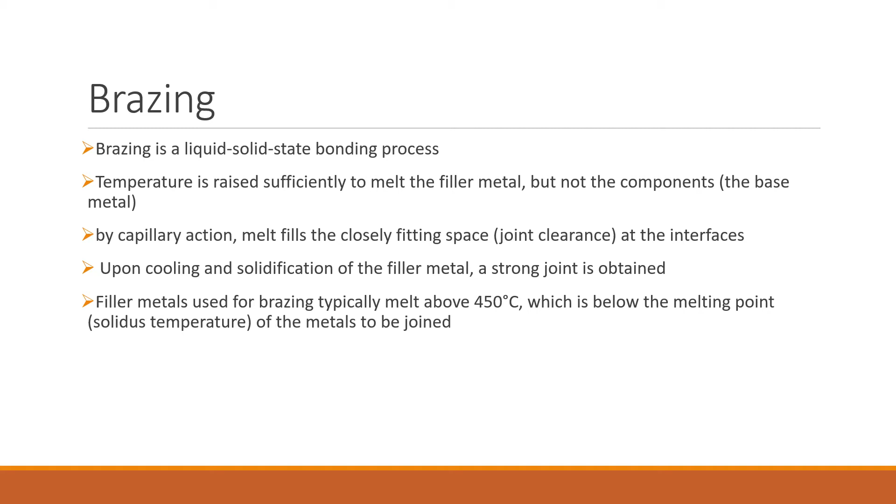So the liquefied filler metal will fill the joint clearance by the phenomenon of capillary rise, or the capillary action, which you already know. So once it fills that joint clearance, it will solidify in it and we get a strong joint. So this is a video of an actual brazing operation being done, and you can see the torch that is being used to melt the filler metal.

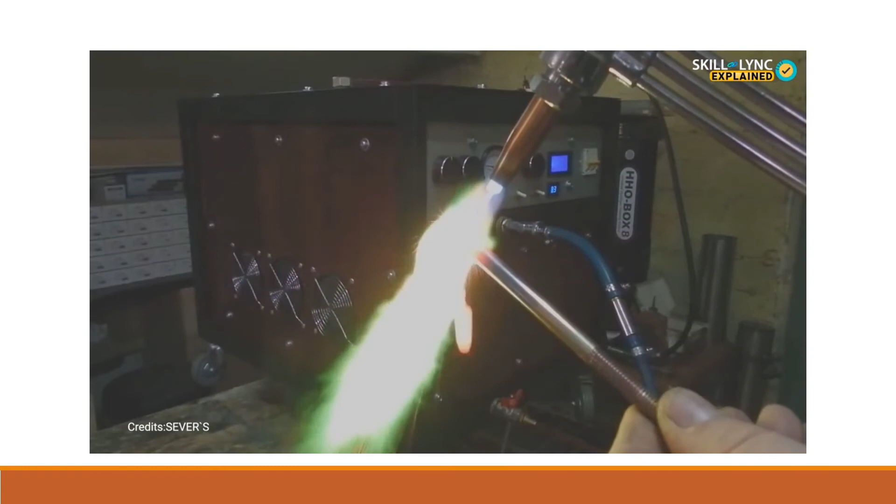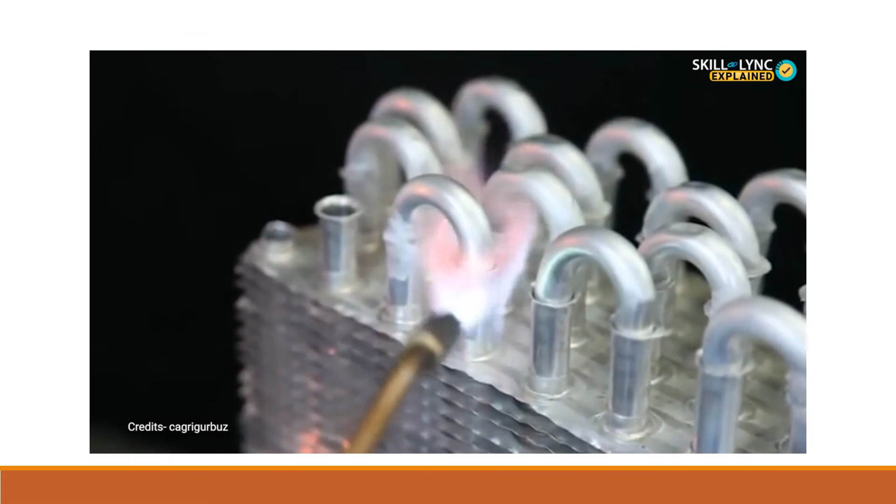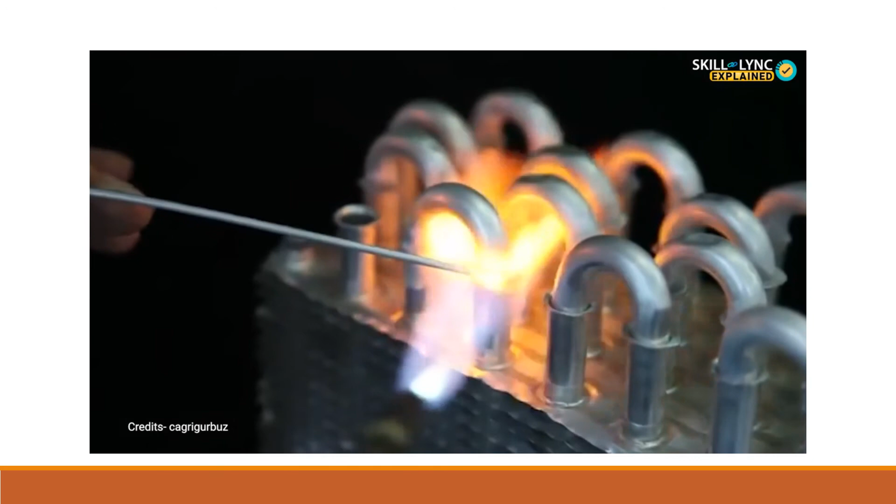So now we can see the video. You can see that the filler metal is being melted using the heat provided by the torch or the flame. It is a reducing flame. Now the base metal to be joined is provided with the molten filler metal. So the filler metal now fills the gap between the two base metal pieces.

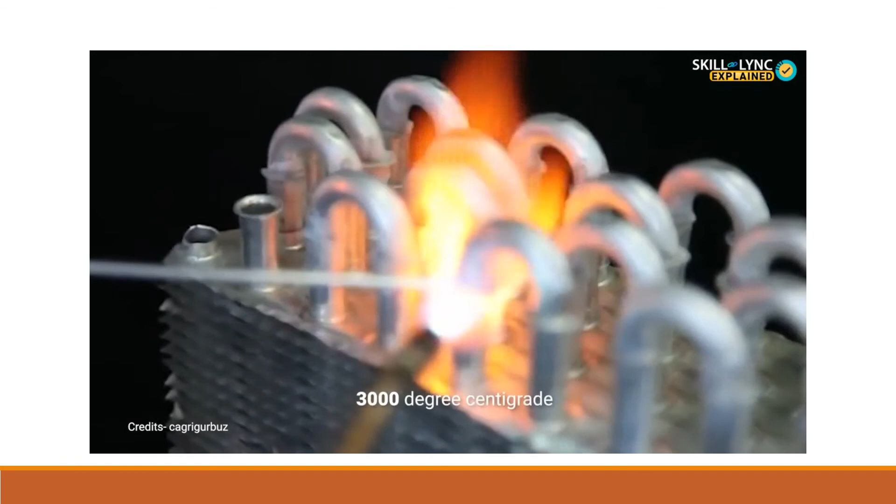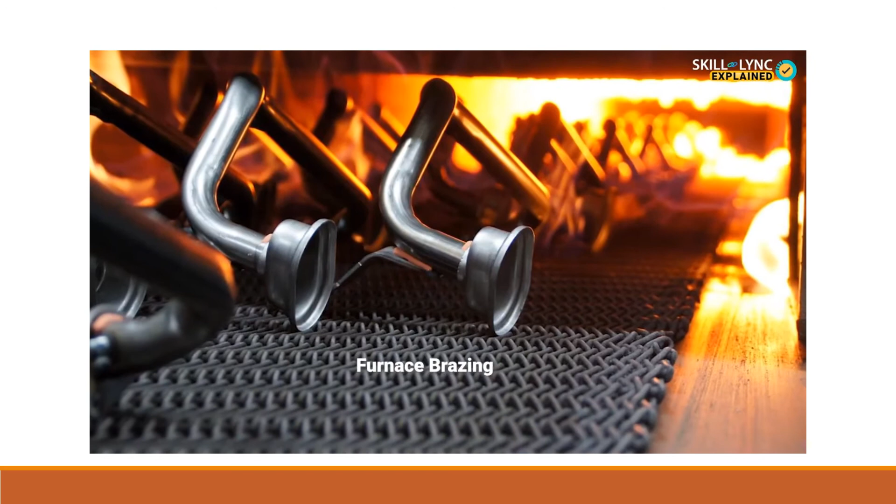And due to capillary action the molten metal will be filling that entire clearance, and once it solidifies we get the joint components, okay, using brazing. So this is the figure of a joined component. So I hope you are clear with this brazing action.

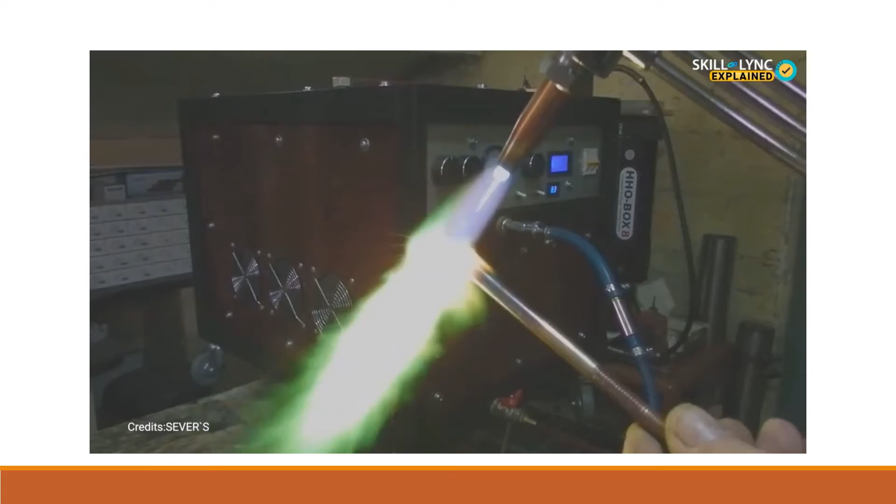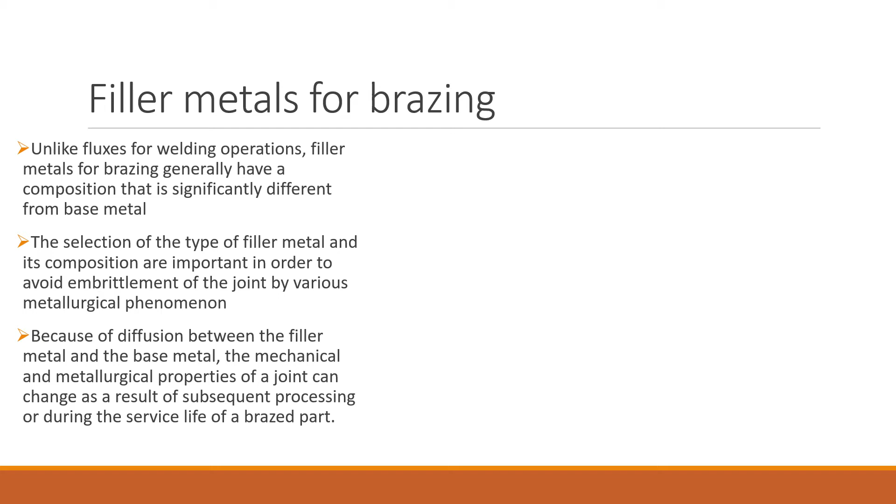Okay, that is the combinations that can be used for different base metal and filler metal. For example, the filler material used for aluminium as well as aluminium alloys is aluminium silicon filler metal, and the brazing temperature is in the 570 to 620 range.

Similarly, iron, nickel and cobalt based alloys, usually super alloys. For these alloys the filler metal we use is gold, and its brazing temperature is 900 to 1100 degrees Celsius. Okay, so these are examples of some of the filler metals that can be used for selected base metals and their brazing temperature.

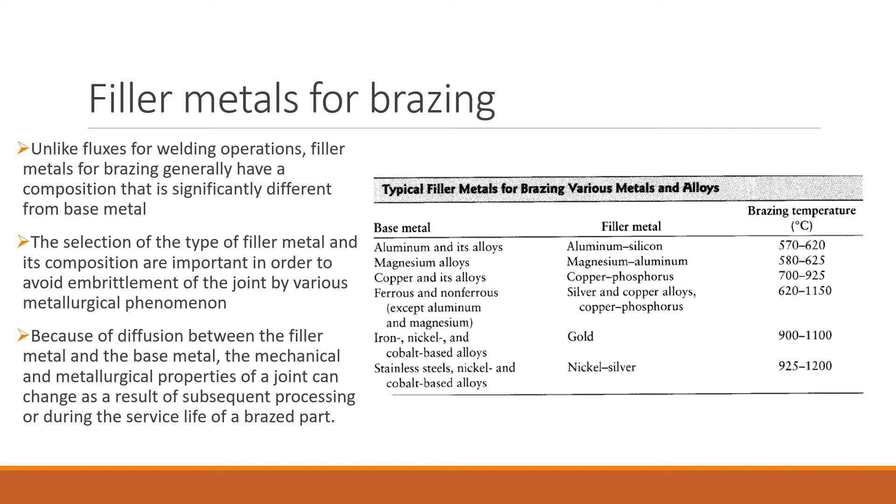So now we will see the various fluxes used for brazing. In welding also we have seen the function or the purpose of using fluxes, which was to prevent the oxidation and to prevent the formation of oxides, which was not desirable as it could reduce the strength of the welded joint.

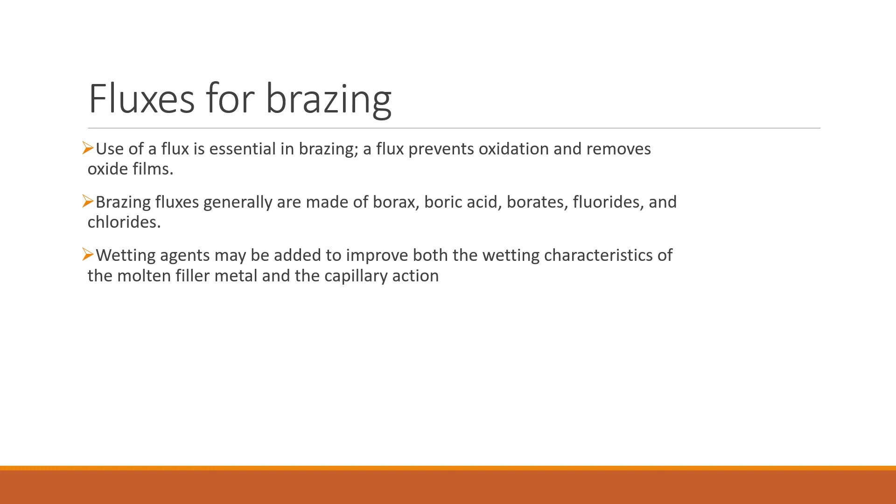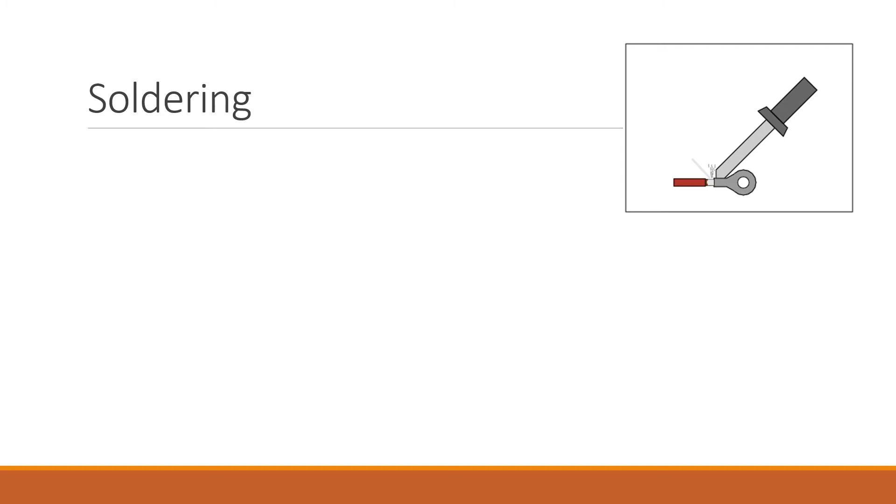So that's all about the fluxes that are used in brazing. So the next method is soldering, and this is a very familiar or popular material joining process, and it is mainly used in electronics industries to connect the electronic components on the circuit board.

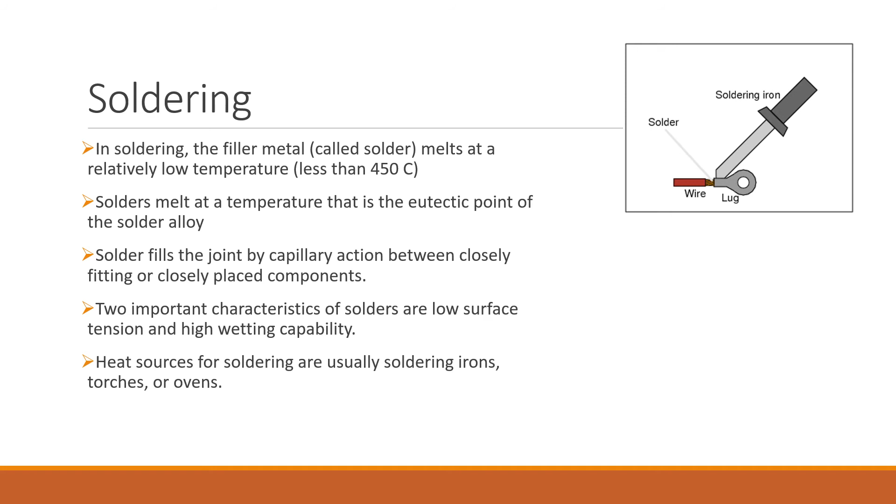It will be melting at a temperature that will be lower than 450 degrees Celsius. So based on this criteria, we can classify soldering and brazing processes separately. So the solders melt at a temperature that is the eutectic point of the solder alloy. The eutectic point is the lowest melting temperature of the alloy, and alloys will be having a range of melting points. And the filler metal we use in this method will be mostly alloys.

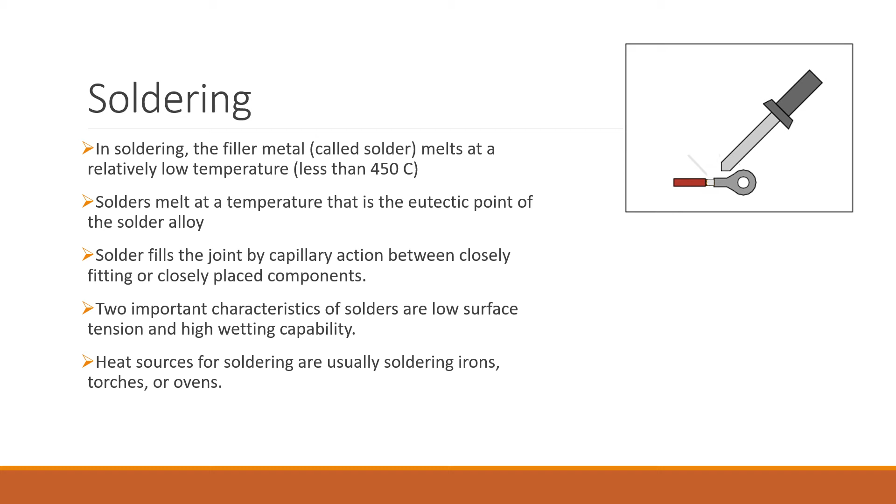And the mechanism of joining is similar to the brazing action, that is, the molten solder will be filling the gap between the two components to be joined by capillary action. So you can see the animation played on the right side of the screen. Here a soldering iron is used to melt the alloy or the filler material, and you can see how the filler material fills the gap between the two components to be joined, that is by capillary action and low

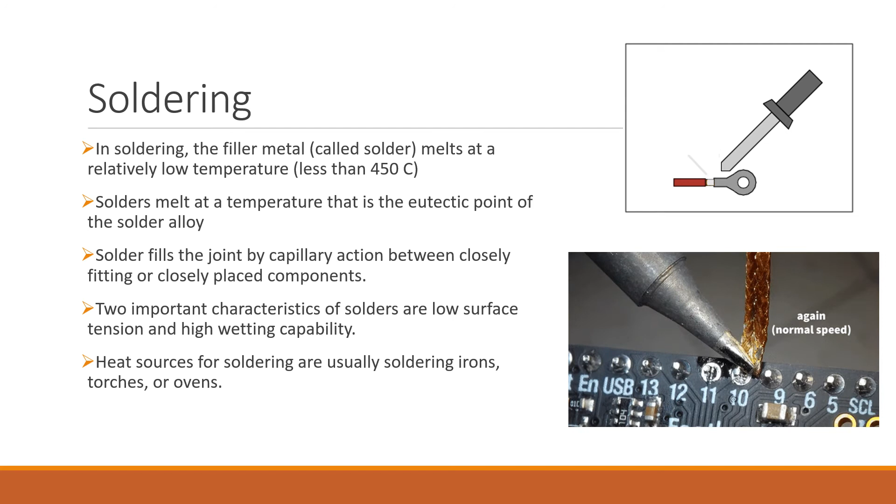So we will now see the various materials that are used for soldering.

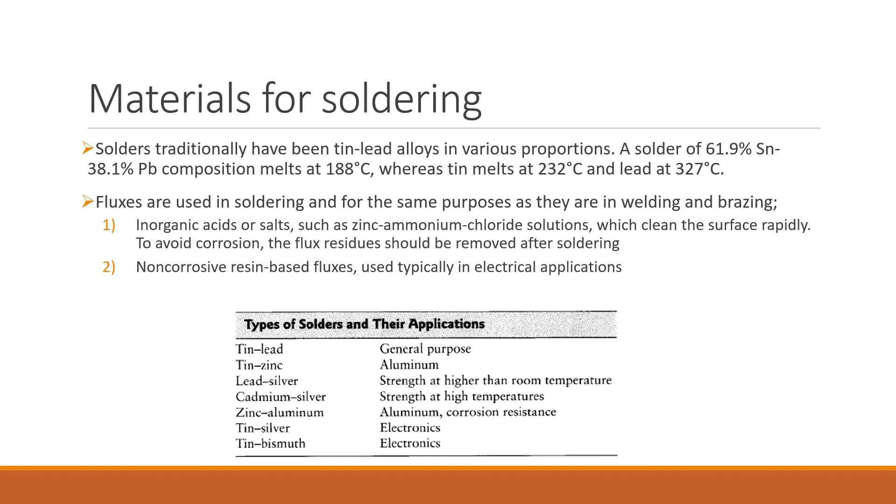So once the soldering is done, we should clean that surface properly. Now the second type is the non-corrosive resin-based fluxes, and this one is mainly used in electrical applications in circuit boards. So we can now see the applications of soldering.

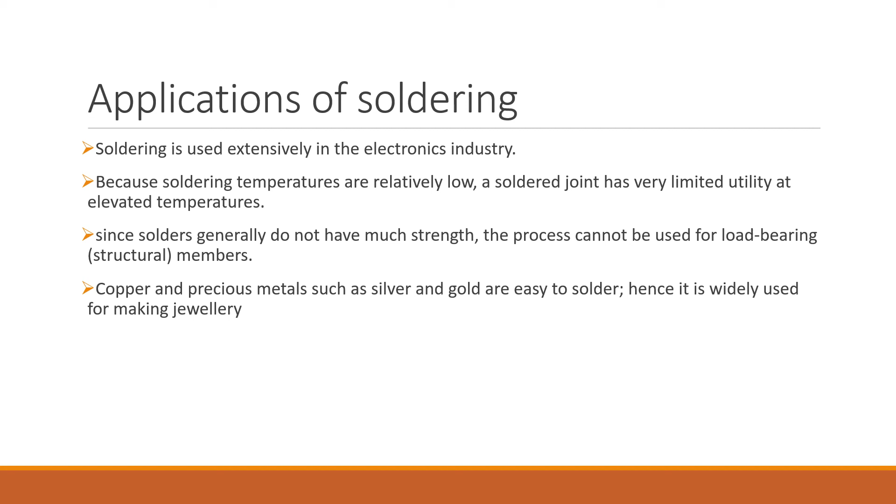Now we can move on to the adhesive bonding. So the last one in the mechanical joining is the adhesive bonding. So this is again a commonly used method. So numerous parts and components can be joined by using adhesive bondings. Now the best example or a most popularly seen example is the formation of plywood. So the plywood is formed by joining different layers of wood using wood glue, okay.

So ആ wood glue നെയാണ് നമ്മൾ adhesive എന്ന് പറയുന്നത്, and we are joining the wood layers using this wood glue, which is an adhesive bonding case. And mostly adhesives used have an optimum temperature that ranges from the room temperature to about 200 degrees Celsius for the maximum shear strength. So usually we will be using adhesive to join two parallel plates, and it will be subjected to shear stresses. So above 200 degrees Celsius ഈ adhesive bonding actions or അതിന്റെ strength reduce ചെയ്യുകയും അത് fail

ആവുകയും ചെയ്യുന്നത് കാണാറുണ്ട്. Now the adhesives are available in various forms: the liquid, paste, solution, emulsion, powder, tape, film, etc. So these are available in all these variety of forms, and usually the thickness of adhesives applied is 0.1 mm. A very small layer of adhesive will be applied between the two layers to be joined.

Now, some of the properties that are required for an ideal adhesive is that it should have adequate strength to resist the shear and peel forces. So adhesive bonding വഴി join ചെയ്ത രണ്ട് layers, രണ്ട് base metal or usually metals അല്ല, രണ്ട് layers, once it is applied for the purpose, it will be subjected to shear stresses as well as normal stresses or peel forces.

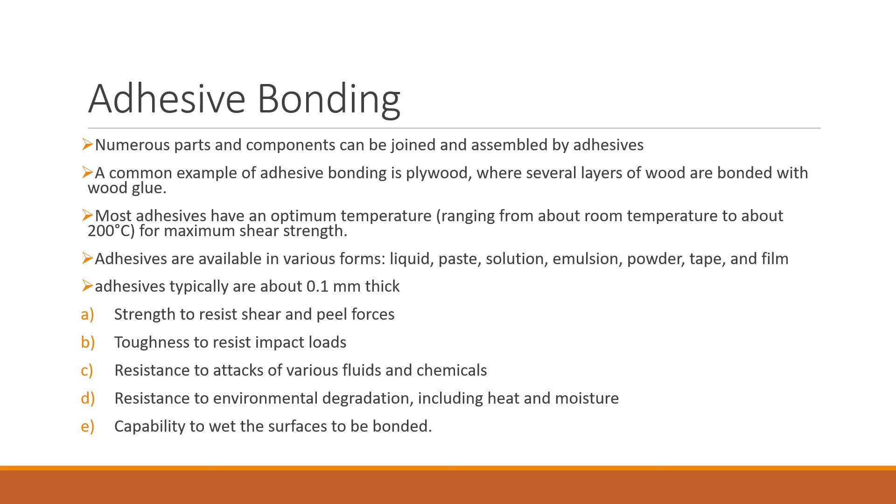Then it should be capable enough to wet the two surfaces to be bonded. So once again, the concept of wettability is coming here. So if it is not having good wettability, ആ ഒരു adhesive-ന് രണ്ട് മെറ്റീരിയൽസിനെ join ചെയ്യാനായിട്ട് സാധിക്കില്ല. So it should have proper wettability.

So we will now see the different types of adhesives. This can be classified into three basic types: the natural adhesives, inorganic adhesives, and the synthetic adhesives. So natural adhesives are obtained in their original form or in the organic form, such as the starch, soya flour, and animal products. So in the case of starch, if we are dissolving starch into water, we will get an emulsion-like adhesive that can be used for pasting papers and all. Okay,

but in the case of natural adhesives, the strength they can provide is less compared to the other two, and hence the applications are very limited. Now the second one is the inorganic adhesives. They use ceramic and inorganic polymers, and they can sustain their strength even at 1000 degrees Celsius and higher. They also offer excellent adhesion with inorganic substances such as ceramic, glass, and metals. So these inorganic adhesives are mainly used in ceramic, glass, and metal industries.

And the last one is the synthetic adhesives. So these are based on the elastomers, thermoplastics, emulsions, and thermosetting plastics. In this, the thermoplastics are mainly used for non-structural applications. They can't bear very high loads, but the thermosetting plastics can sustain very high loads, and they can provide excellent strength. Hence, they are used for the structural bondings.

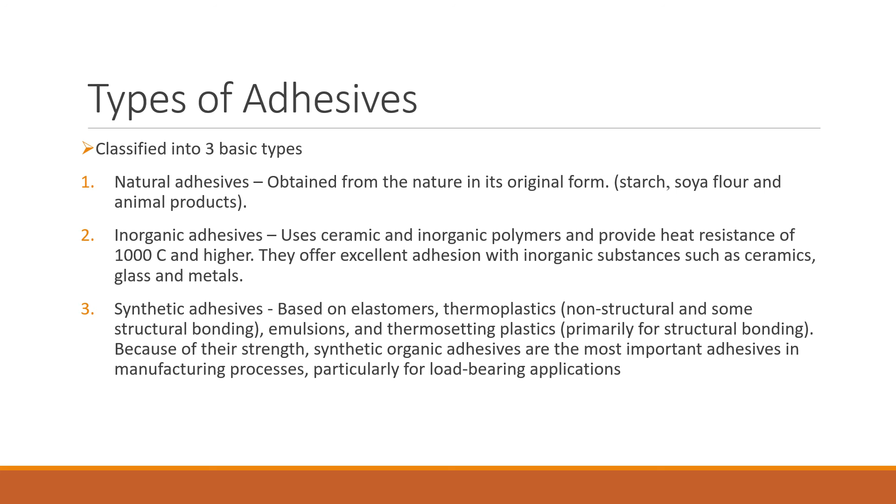So natural adhesives and inorganic adhesives have a limit to the load they can sustain or bear, but synthetic adhesives provide excellent strength, and especially the thermosetting plastic synthetic adhesives can provide very high strength. So they are mainly used for load bearing applications and in many manufacturing industries. So these are about the different mechanical joining processes, that is the brazing, soldering, and adhesives.